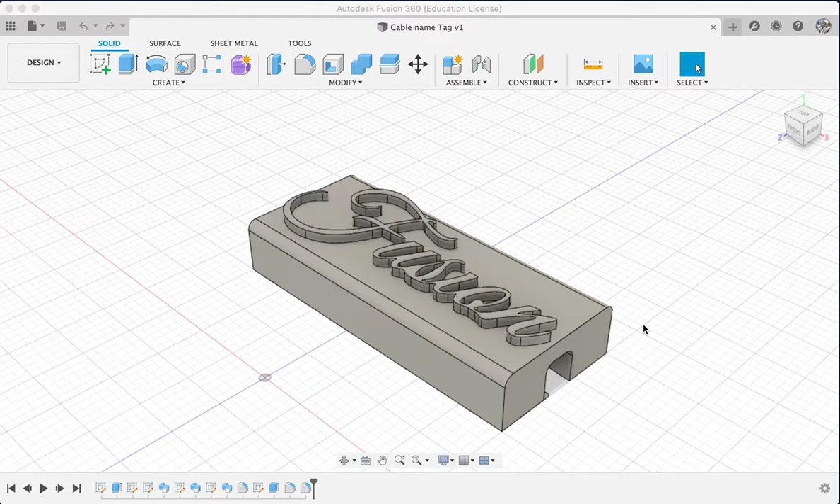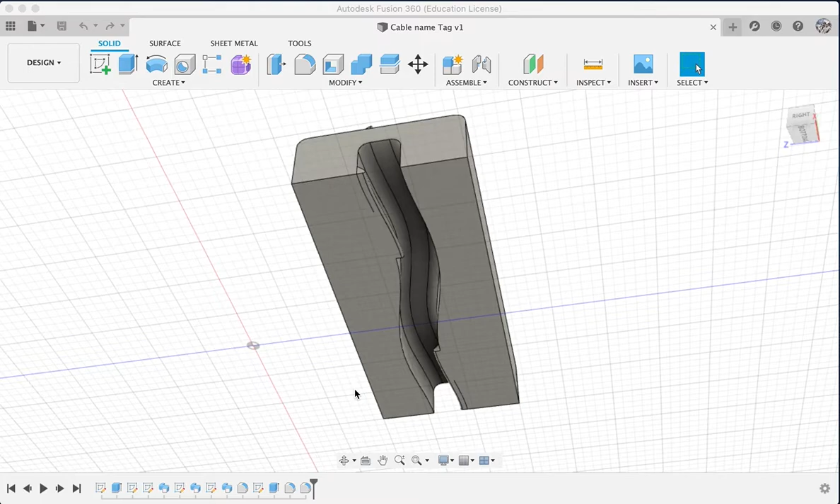Next, we are going to create a name tag. So it will look something like this, with a stopper to prevent the name tag from falling out. Because in the market right now, the cable charger for handphones will be from 2.72 to 3.05 mm so far, for the ones that I made.

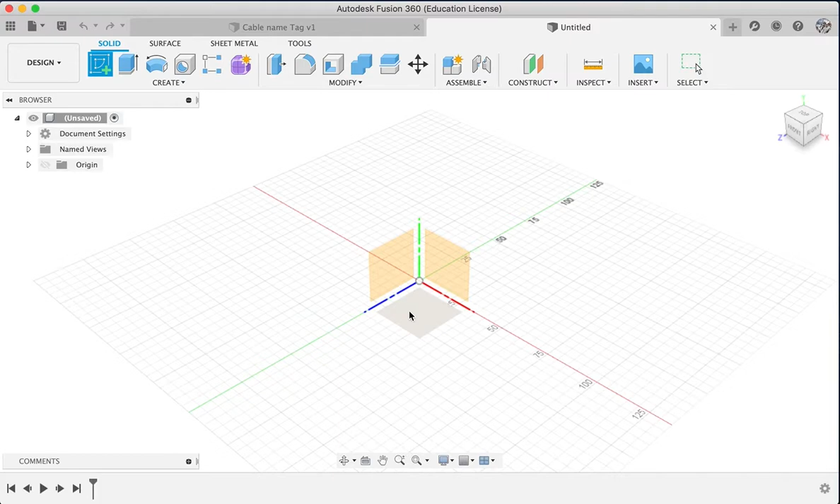So let's get started. We'll go to the new design and we'll go to create sketch. I will select the plane that I want to draw. Then I will select the 2-point rectangle. Then I will create the size. I think 15 by 35 will be more than enough for the text that we are going to create.

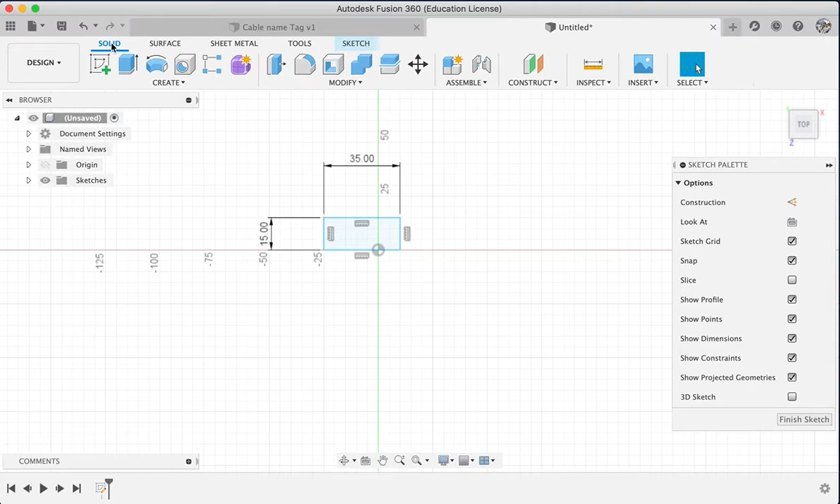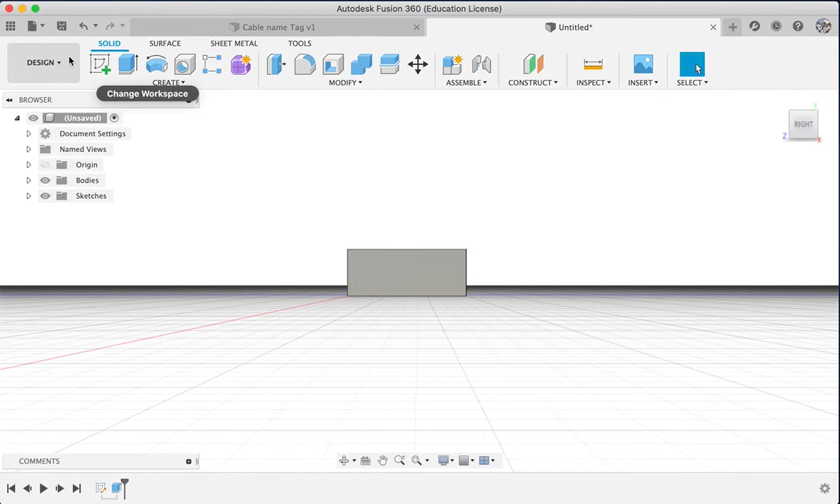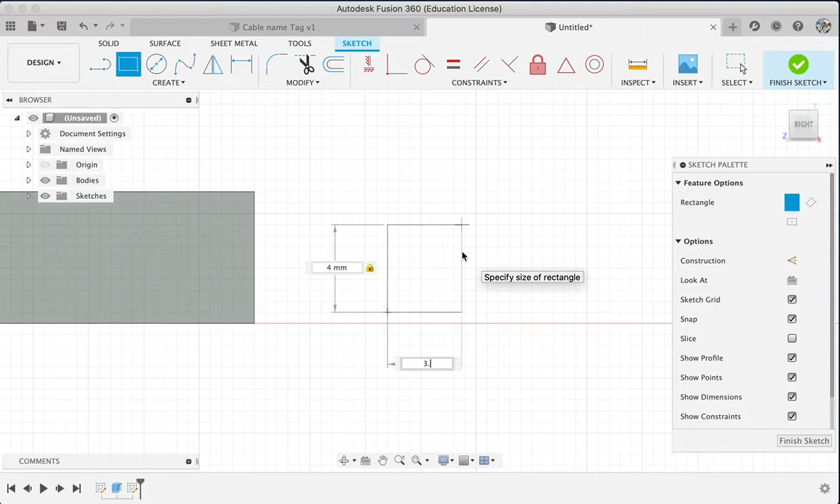After which I will go to solid and extrude. I think 6 mm is a great height. We don't want it to be too bulky. So I will go to the side, the right side of the cube. Then we will go over here, create sketch, select the surface that we want to draw. After which we will select a 2-point rectangle. We give it a height of 4 mm and the width of it, I think 3.7, will be more than enough.

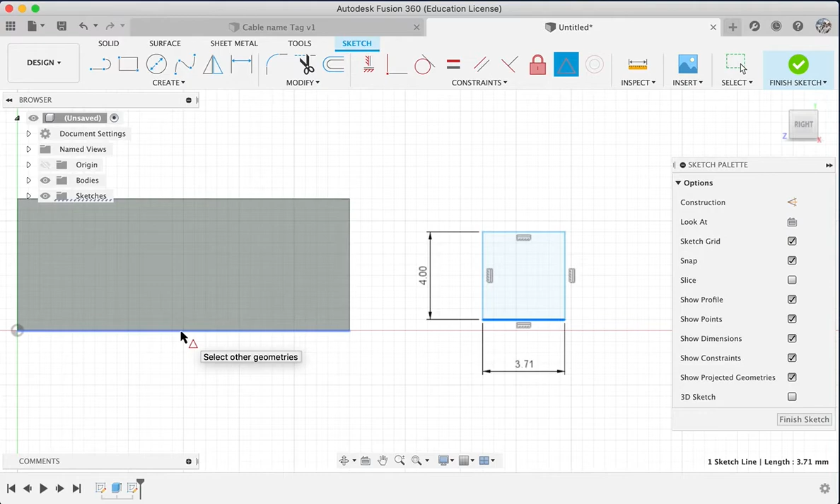So after which we want this square to be on the center of this surface. So we can select the midpoint constraint, we select this, and we select the line over here. So it will go to the center of this line, which is very nice. After which we will go to the base. We will go here and create a sketch again. Select. So once I select, I go to create.

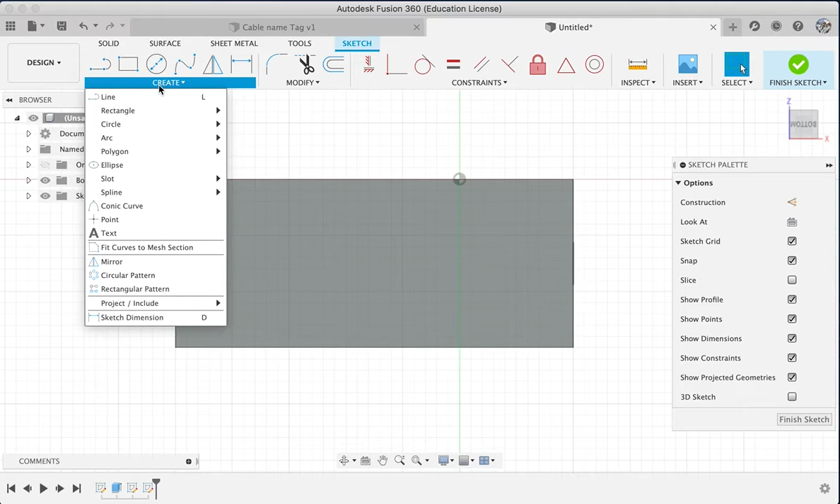I'll go to the spline and go to the fit point spline. From here, how do we identify the center point? Of course, some people may say, oh, I just draw a line and do the calculation and etc. But Fusion actually gives us inferences. So when I move my cursor along the line, do you realize there is a triangle? It will tell us this is the center of the side, and it will give us a blue color indicator. Same thing over here, you will do the same. So I know this is the center.

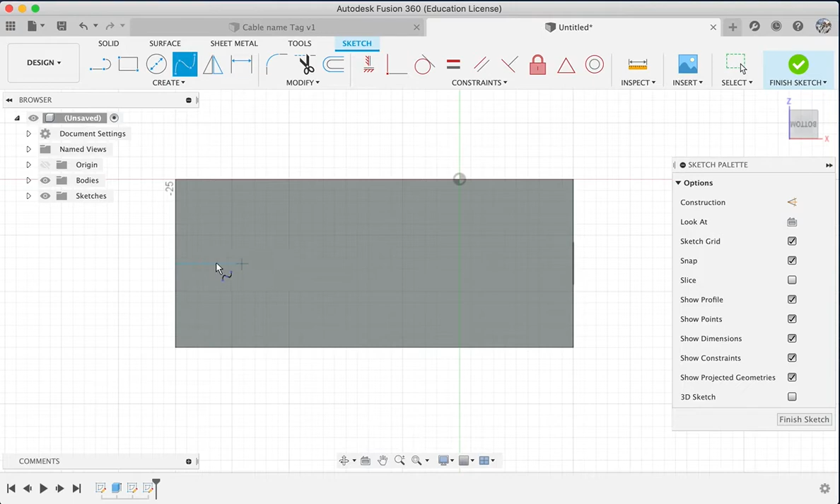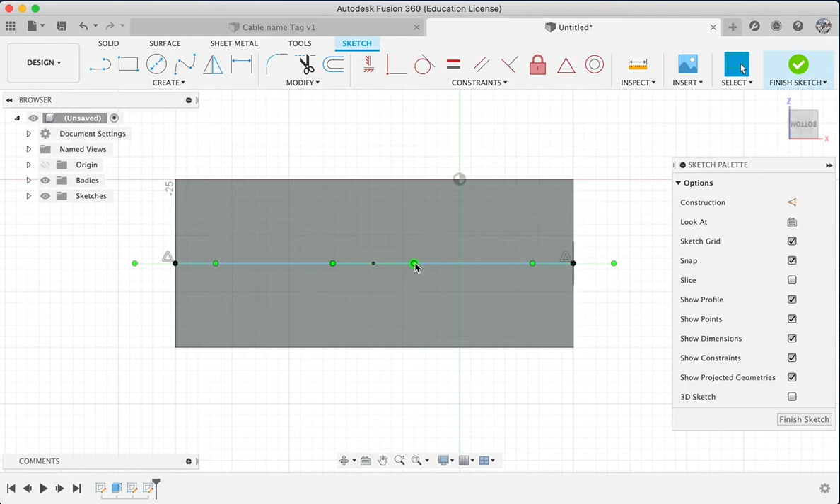So I left click once, let go the mouse. I left click again on the center. Then I left click again to the side. Once I finish, press enter and escape as a habit. This seems like a straight line, but fit point spline, as we know, can be curvy. Alright? So it's up to us how you want it to be. I think this curve is quite nice.

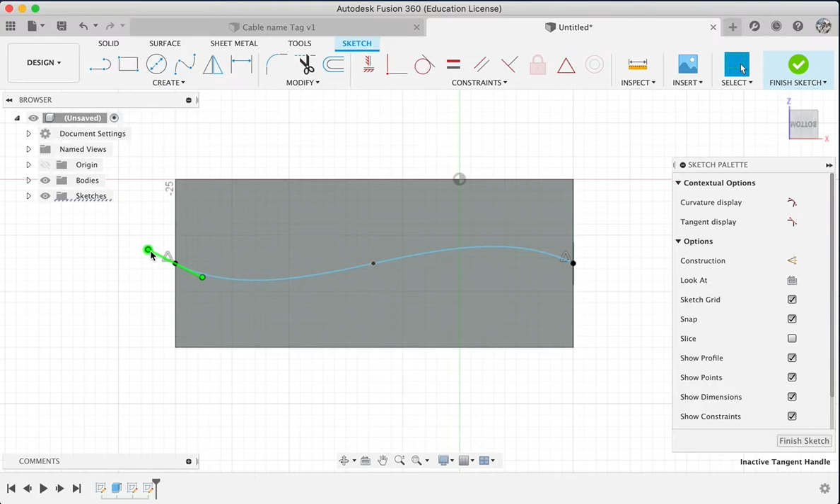When I select any point, they will have this angle adjustment for us, but we want to fix the two sides. So right now I select the line. I will use horizontal vertical to fix on the point. Once I'm done with this, press escape as per normal. So right now we have the block, we have the pathway that we created.

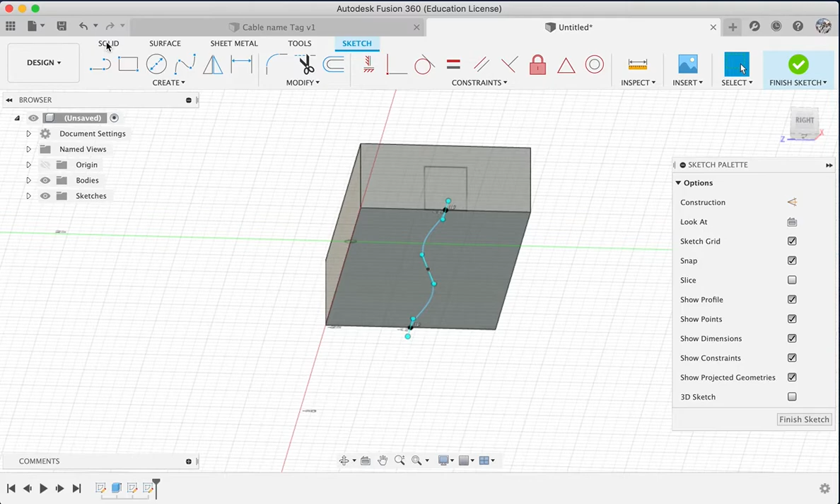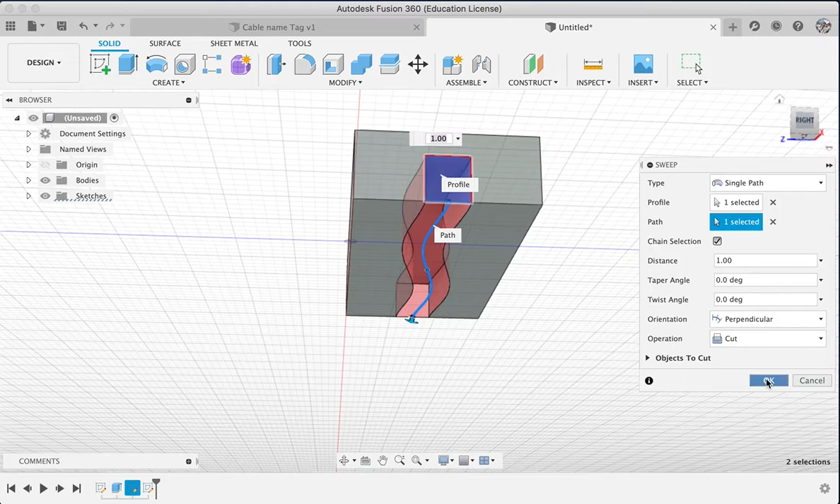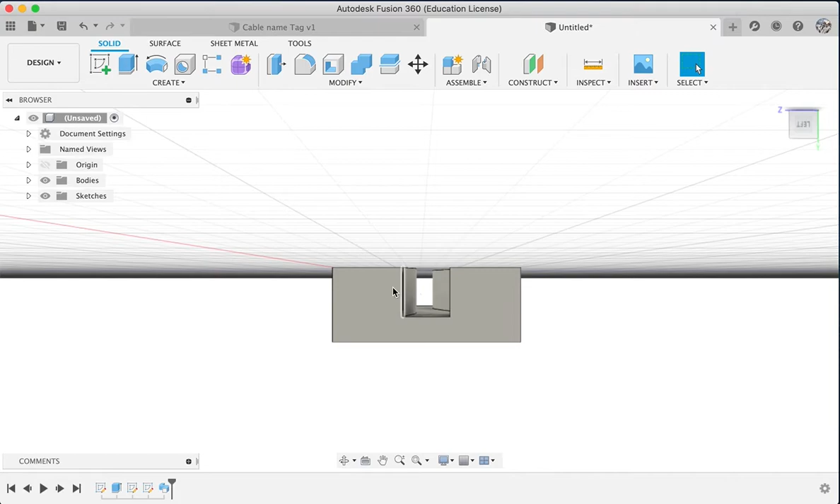Then we go to solid, create, sweep. So we select the profile of this, and the pathway, we select the line. Do you realize it cut? Now we have created the pathway for us to insert the cable. But if you realize, sometimes it may just fall out unnecessarily. So we're going to create a stopper on both sides to prevent the cable from falling out.

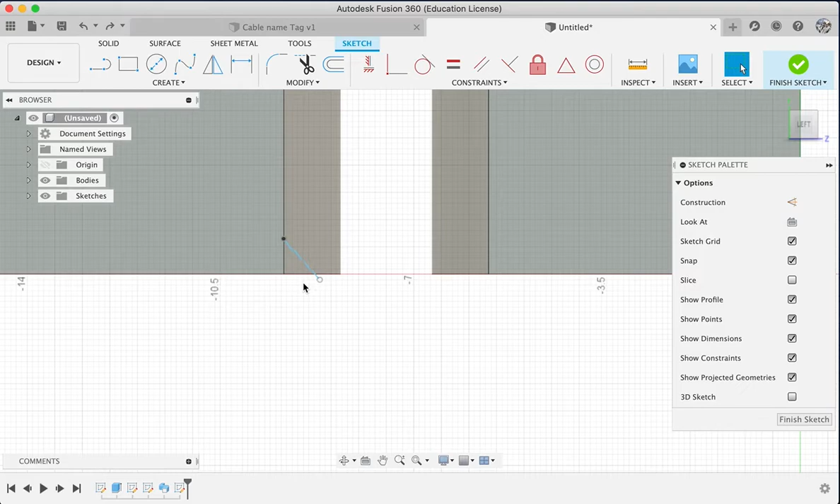So we go to create sketch, we select the surface. Okay, right now I will use a line tool. I will just draw a triangle. Oh, sorry. I will draw a triangle, but let me cut this away. I just draw a line, so I have a triangle in this. All this is unnecessary, we can use trim and trim it off, doesn't matter.

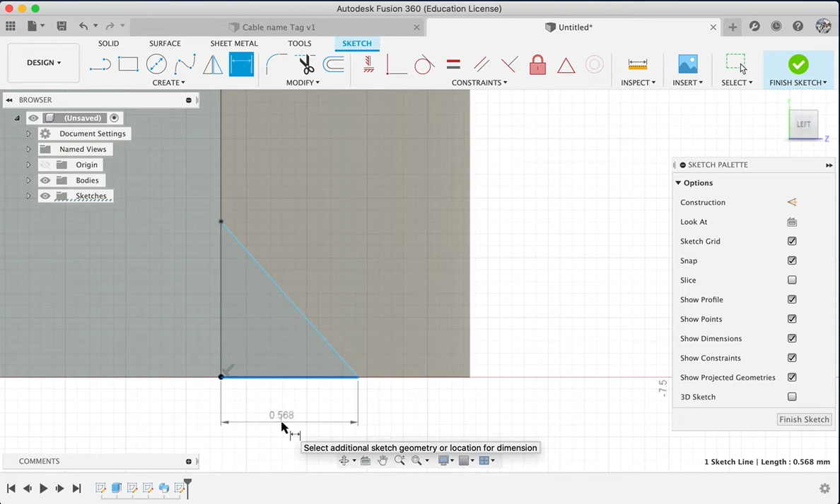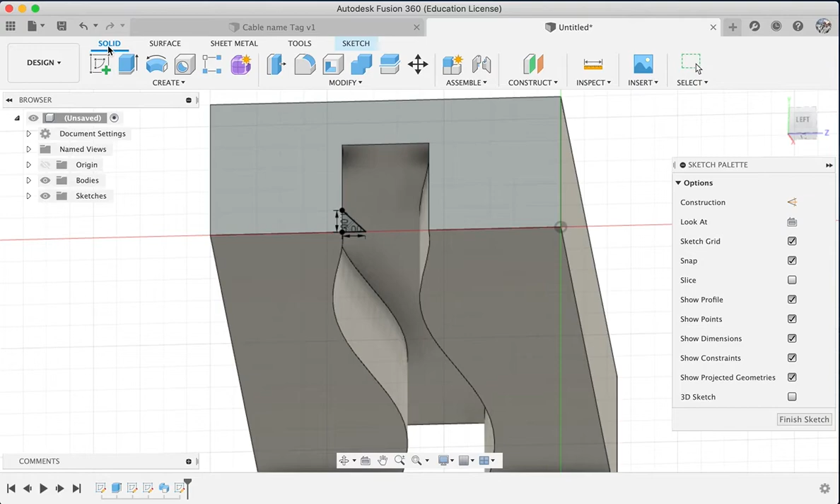Then we will use a sketch dimension tool. Select this line, move it down. I want 1 mm. Then after which I will use this, and on this side I want to create a distance height of 1 mm. So once I'm done with this, I will go to solid, create, and I will use a sweep tool again. Select the triangle surface which we created, and the path, we will use this.

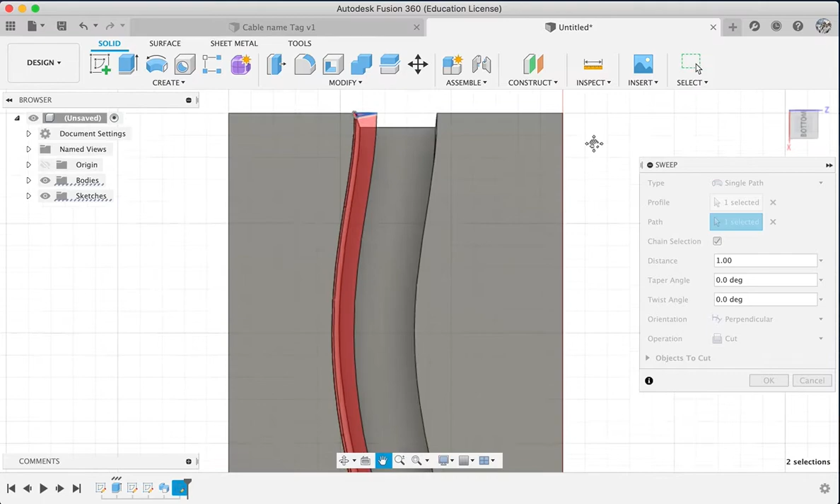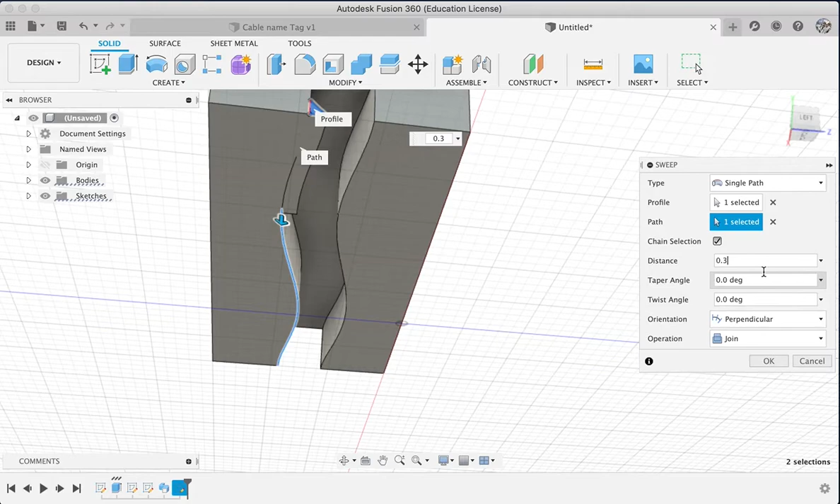But do you realize when we select the path, it will cut all the way? And how do we make it solid? We have to change the operation to join. But I feel that if we create such a long one, it may be a bit too narrow for us to insert the cable properly. So I will change the distance to 0.3. So it will be 1/3 of the path.

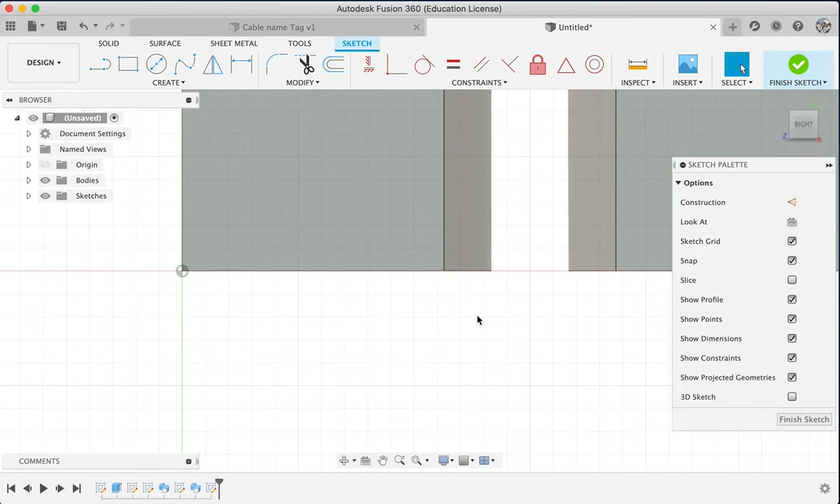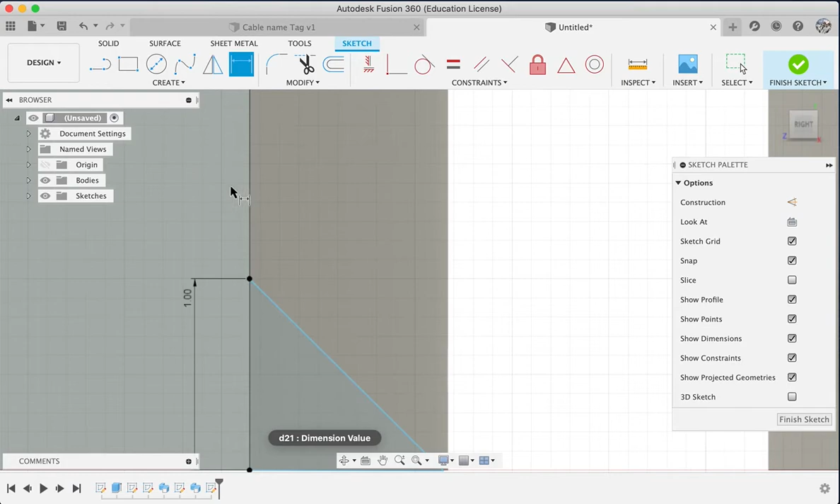This side we will do the same thing. Okay, make sure the selection is correct. So this is the area where we want to add the other side, the stopper. Select the line tool. Oh, okay, let's move it slightly up. So we can use the dimension tool again to create a height. After which we will go to solid, create the sweep again, same thing along the pathway, 0.3, join. Okay, so now this is done.

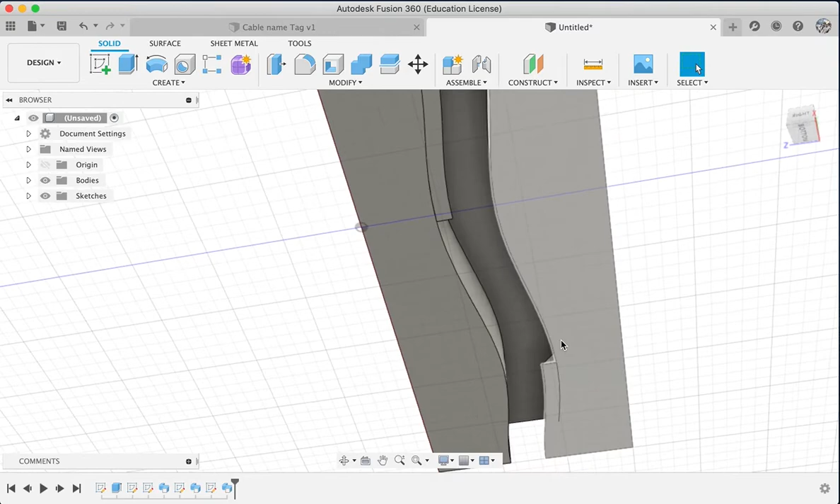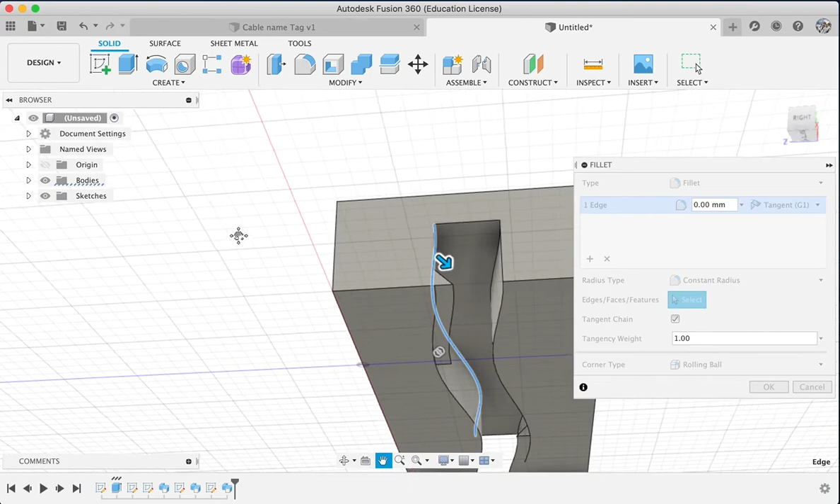You know, cables are mostly circular, so we want to create a curved surface. We can go to solid, modify, and fillet. We will select both sides. Give it a 1 mm radius, and the stopper we will give it maybe 0.2, just slightly curved, so at least there are no sharp edges.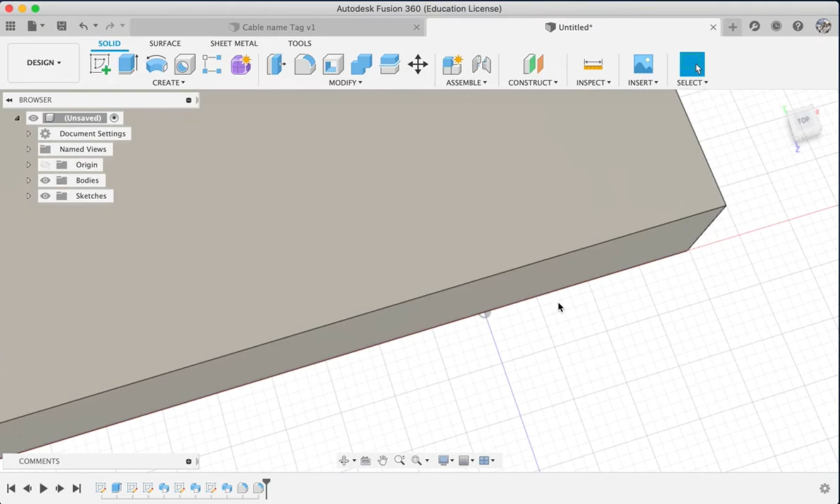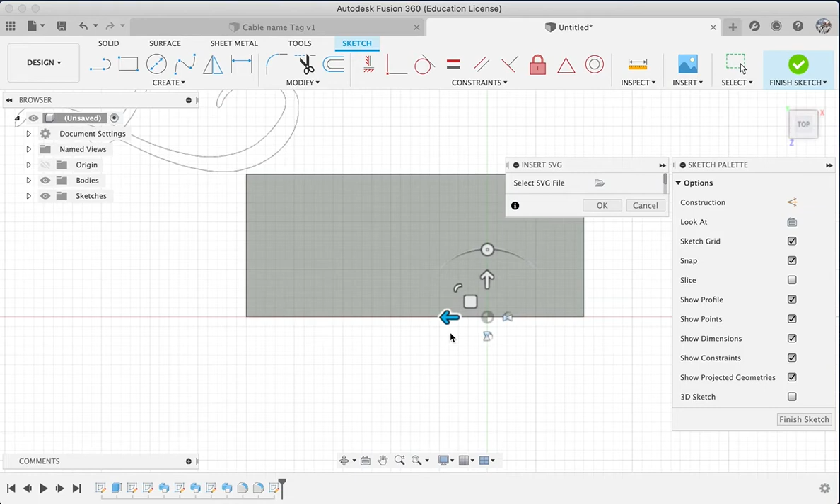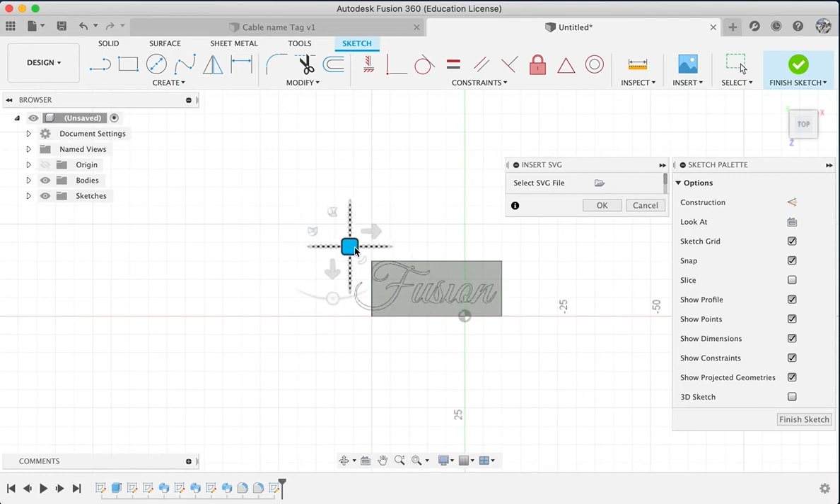Once we are done with this, we can go to insert and insert the SVG text that we created. After which we'll go to download, and I'm going to find my text. I think I'll just use this. It's coming in the wrong direction. Either you rotate your cube, or else you rotate your text by selecting this. Okay, so for me, there isn't any rule. It's whatever you can do.

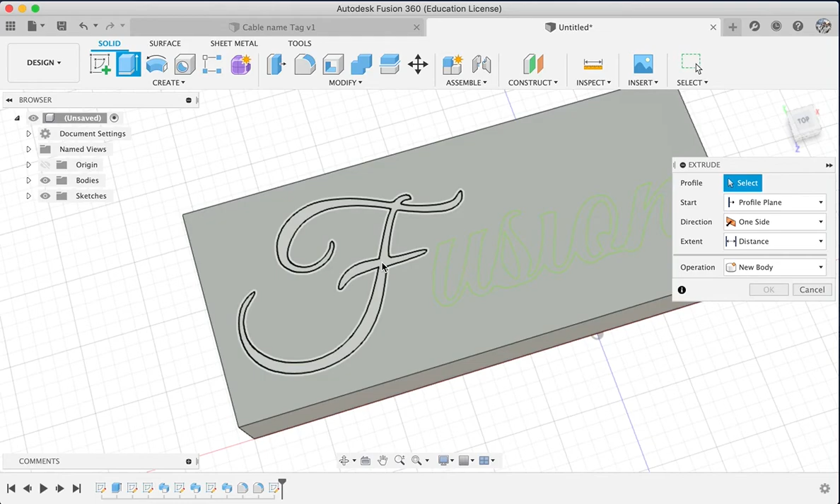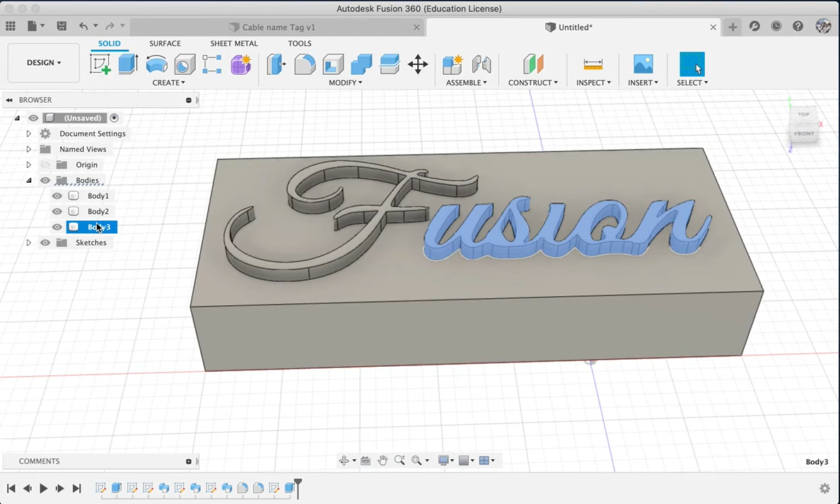So once I'm done with this, I adjust the area I want the text to be placed in and I click OK. Then I can go to solid, extrude. I will select the text that I want to protrude out. I give it 1 mm and make sure the operation is join, because if the operation is not join, just new body, I will have multiple bodies. Do you see? We want to 3D print it out, so we make sure when we extrude it's join, so it will still be a single body.

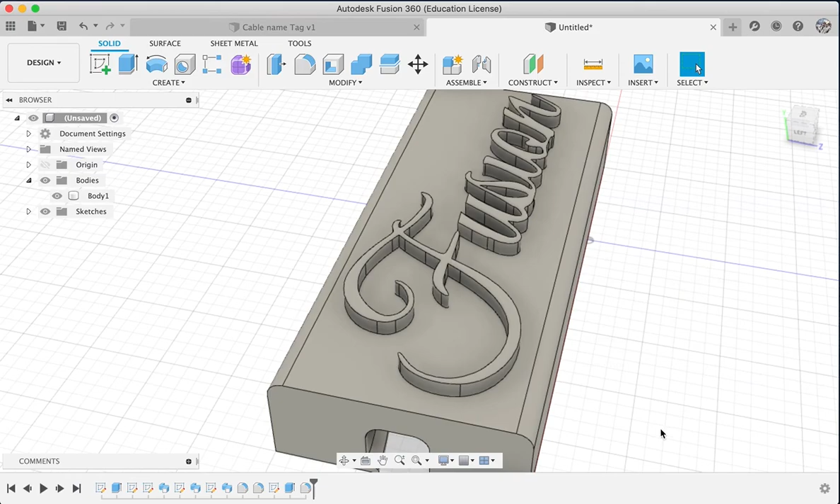Once I'm done with this, I can use fillets and adjust the sides and make it nice and beautiful. So this is how I created my cable label. But again, you can design your own with all the logos and icons that you like. Just convert it to an SVG, so it's easier to bring in. Okay, that's all for today.